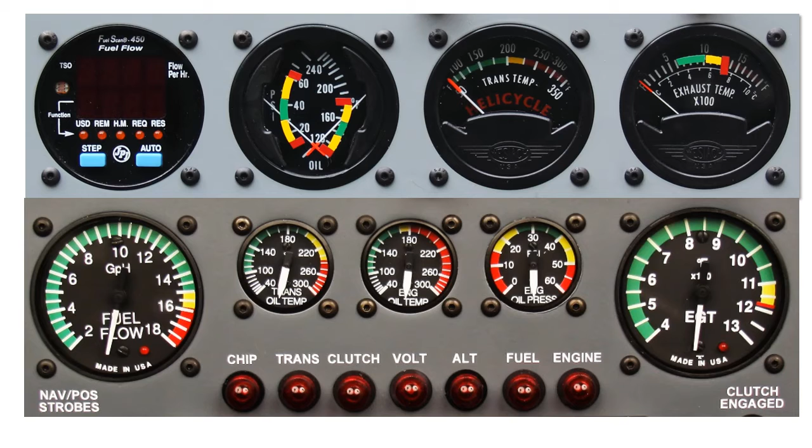Okie dokie, on to the next one. So now let's take these one by one. So what's the difference between the stock ones and the custom ones that I sell? The stock ones are all 90-degree sweep. Mine are all 270, so I've got 3 times as much arc to work with. So that tends to expand the scale out.

These are the same size. It's almost an optical illusion. You'd swear that mine is much bigger, but they're not. I've tried to line up the screw holes when I put this together. But you can see that there's just a huge difference in readability.

Now, in the case of these, both of them have warning LEDs, and you see the ones lit on the stock instrument, and they both have external alarm outputs. The fuel quantity stock instrument is the only one that has an alarm output. That's it.

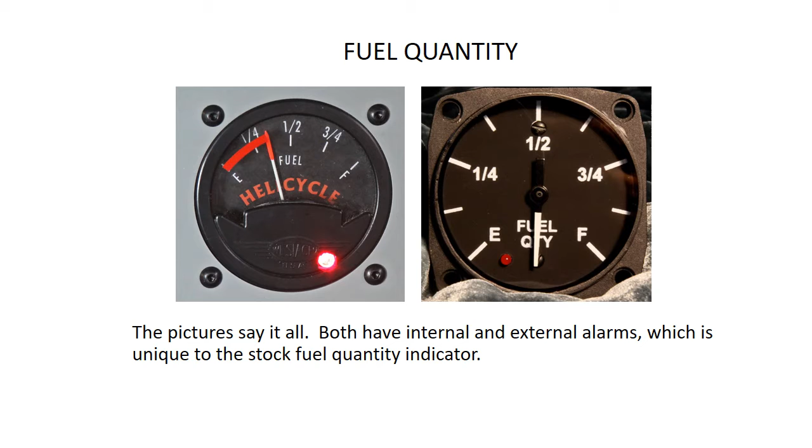Here's EGT. This is a great example. I think mine is 1,000 times better than the stock one. So let's say you're flying along and the temperature you think is around 1,000 maybe, or 1,100. Look on that stock gauge. Can you really tell the difference? First of all, my tape is in the way, so you can't really see the lines anymore. But that's like, I don't know, 1/16 of an inch between those tick marks.

How do you know when you've got to 1180, which is the red line? And if you're not staring, how do you know you didn't go right past it? Well, with mine, it's going to light an alarm. That's how you're going to know. And it's pretty easy to tell the difference between 1,000 and 1,100 degrees. It's about half an inch of movement on that needle. So again, I think it's just a huge improvement.

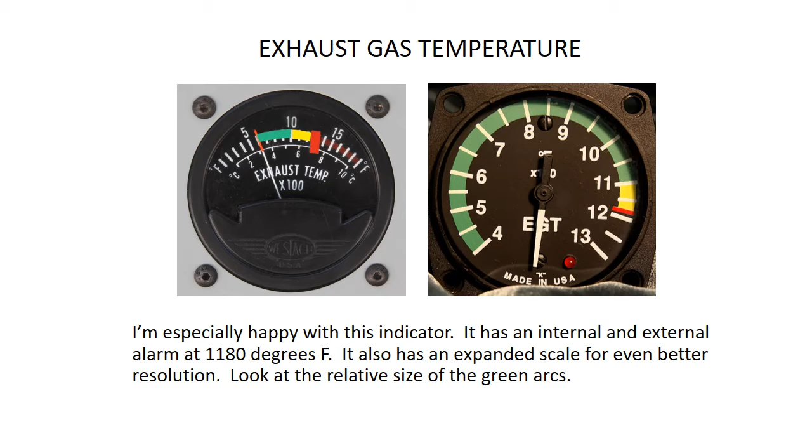Here I don't sell a replacement, but Doug does. But what I wanted to show you with this stock instrument is I borrowed a function generator from work, extremely accurate, down to parts per million. And I adjusted the input on the left to low rotor. So that's sitting at 610. That's the low end of the green zone. The one on the right is 620 RPM, the high end of the green zone.

Look at the difference. It's maybe one needle width. So if you had colored arcs on there, that arc would be the width of that needle. It's totally useless. It really is. And then to make matters worse, if you look at the back of this thing, there's a little hole. Stick your screwdriver in there, you can adjust it and make it say anything you want. It doesn't care. And lastly, it's an analog meter, so as components age, it's probably going to drift. And how are you going to know that it's off, unless you have some test equipment?

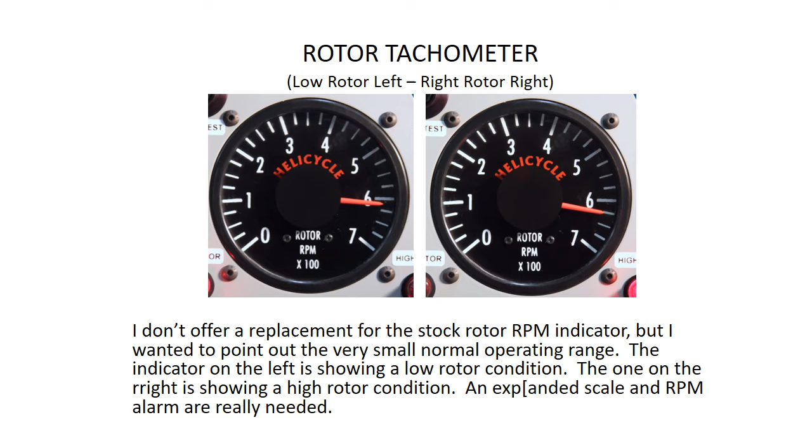So Doug's coming out with a new version. That's why I didn't put the old one up here. It's got an expanded scale. It's dual tach, engine and rotor, stepping motor, digital technology, and it has high and low rotor alarms. And I think that's critically important. Even with an expanded scale, it's going to be hard to really pay that much attention to these things and make sure that you're still in the green. There's nothing like a big idiot light. So once I get one of Doug's tachs, I'll take a picture and I'll stick it in here.

Here's fuel flow. I went over that earlier, but here they are side by side. And if you do a little test, and my eyesight's not very good, so you'll have to adjust for your own. But say you focus your eye on the period on the first line after indicator. Stare at that. Maintain your vision right on that dot.

Now tell me what that digital indicator says. What are those numbers up there? You can't really tell, can you? If you can, then your eyes are a lot better than mine, so go down a line or two. But reach a point where you can see it out of your peripheral vision, but your brain can't make anything out of it. Now, without moving from that spot, I ask you, where's the needle on the analog one on the right? I can see that.

And so my point is, out of your peripheral vision, it's pretty simple for your brain to go, okay, is that needle in the green or not? Is there a trend? Is it going up? Is it going down? With a digital one, if it's going up or down, all you see is a pinball of numbers jumping around in there that mean nothing till it stabilizes.

And the way your brain works, because of my particular vision impairment, I'm now a world expert on this. For your brain to be able to interpret text or numbers, you have to stare right at the middle and put that image in the center of your eye in an area called the macula. That's where the highest concentration of rods and cones are, and that's where your brain is set up to interpret what you read. So when you're reading, you're putting the words that you're trying to interpret into the macula in the center of your vision.

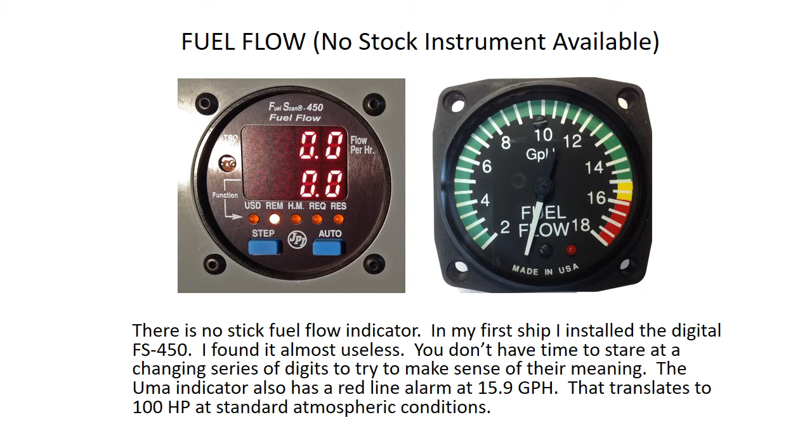Okay, here we have transmission temperature. Same thing. These are these little guys that I sell. It's a 1 1/4 inch. And even though it's small, it's still more readable than the big one. And I've gone out of my way to try and adjust the brightness of the white so that I'm not taking advantage here. I've tried to make them both the same, but because the font is thicker and the arcs are much more brilliant and the needle is so much fatter, these indicators are just really easy to read.

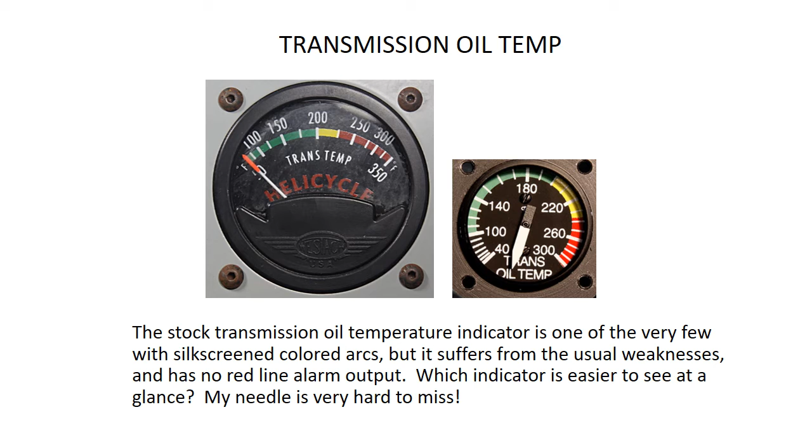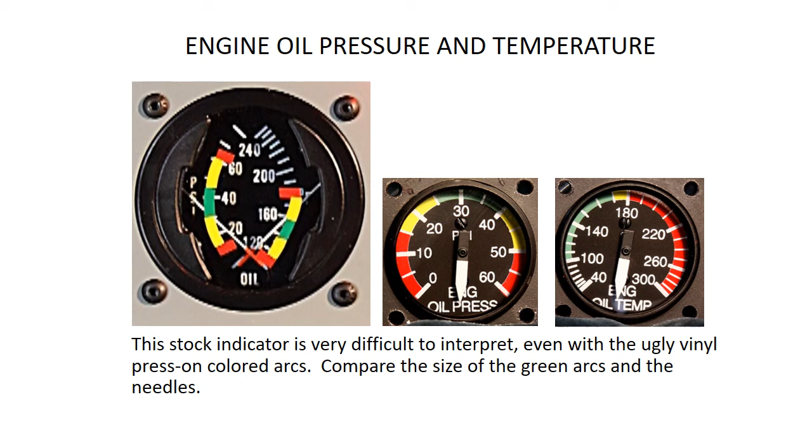Same thing here. So this is oil pressure and oil temperature. This is even more confusing once you put some arcs on there so you know what you're doing. The clutter of these two little cat whisker needles and the arcs that I stuck on there, it's a mess, and it's not easy to know what you're doing. So I replaced that thing with the two you see on the right. And again, instead of a 90-degree sweep, they're 270. They're just much easier to see. I'll stop beating you over the head.

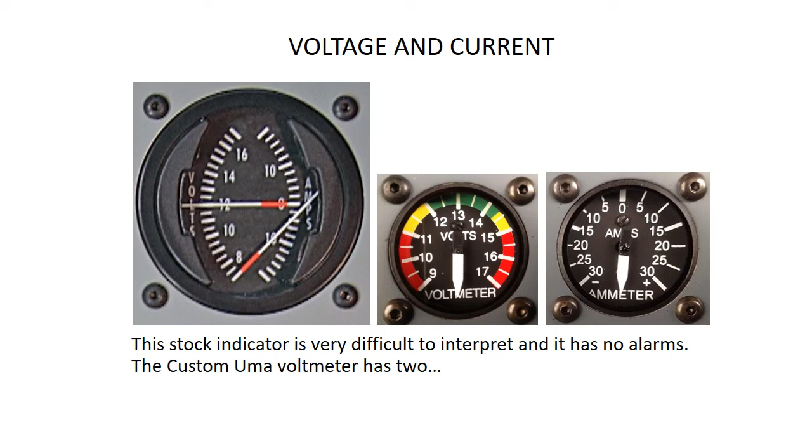And so even if you have a momentary glitch, if it momentarily hits an alarm condition, it will latch that relay. That one in turn drives a 4-watt master caution and warning annunciator at the very, very top of my instrument panel. And that will stay lit until you reset it with a button on my cyclic grip. And so why would you want to do that?

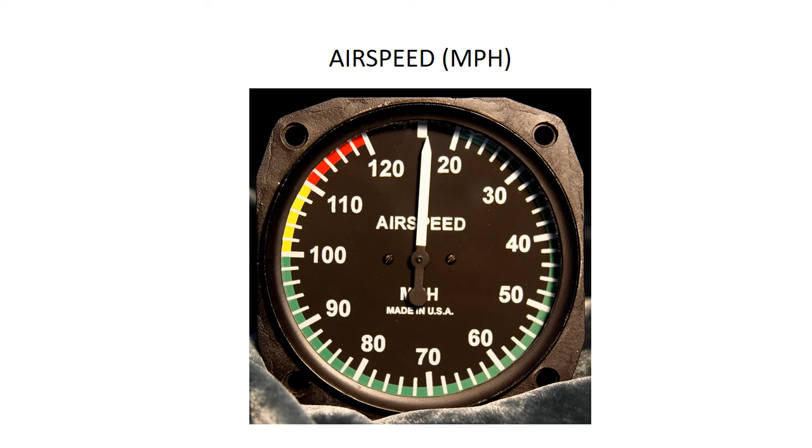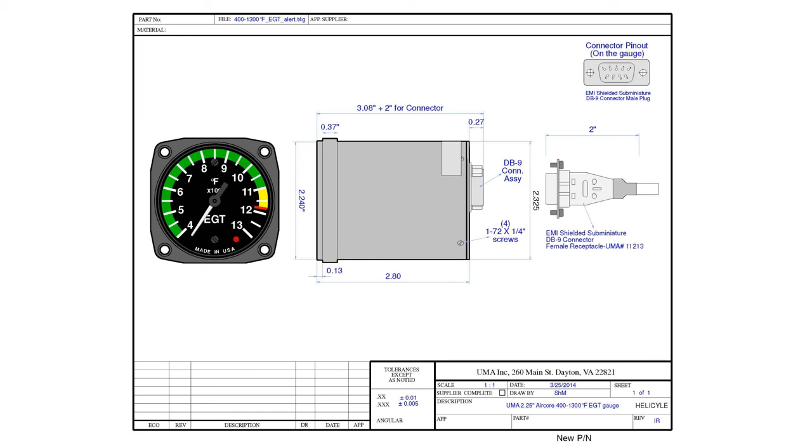containers. And the ones that have electronics in them are susceptible to getting interfered with by any sort of interference that is either radiated or conducted. So these are much more bulletproof in terms of susceptibility to interference, much less. So these are the bigger ones. Here's the smaller ones. These are those little guys I showed you that are 1¼. And that's the end of that.

So I hope you enjoyed this. I hope you haven't lost complete faith in getting your kit together.